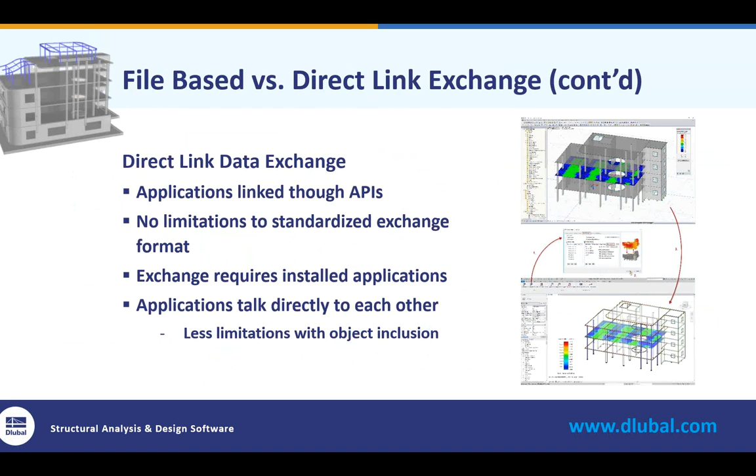With this option, the applications talk directly to each other. So with this, we're going to see a lot less limitations with object inclusion. So back to my previous example with nonlinear supports and load combinations, well, now we can just code in the option through the API interface to keep this information available. So whether we're round tripping between the programs, we'll never lose that information, even if it isn't necessarily included in the program that we're interfacing with.

So this leads us to the Dlubal Revit link and the import-export options available. So I want to first note that this does utilize direct integration with API. So again, we're going to see a lot less data loss than when we're creating a data file format. This option is included in RFEM.

So for those of you who are not familiar with our programs and how they work, we do operate with the add-on module system. So RFEM is our main program. This provides us with a full analysis. Our add-on modules are utilized for design, for example, or dynamics. Well, the import-export options with the Revit link are all included in the main program, and this is at no additional cost. The ability to integrate between the two programs is bidirectional. So we can update all or only partial of the structure and continue to cycle between both programs continuously.

You can transfer the structure objects. So we can see here from our dialog box to import export in Revit directly the ability to turn on or off these objects. We also have the ability for the transfer of loads and load combinations. So in our next tab, the structural settings, again, you see the ability to turn on and off those load cases, load combinations, result combination options.

And lastly, with regards to result sharing, we have the ability to export the RFEM results to Revit. This includes both members and surfaces. So we're going to see the information available for deformations, internal forces for those members and those surfaces, and reinforcement, for example. Now, we've had the ability to transfer reinforcement of surfaces, so whether that's walls, elevated slabs, slab-on grades for concrete design from RFEM to Revit for quite some time, but we also recently added reinforcement for members.

I want to turn it over to my colleague Lukas now, who will take us into an example between the two programs today. Okay, thank you very much, Amy, for the introduction and the overview. I think you should be able to see my screen. Hello also from my side.

In the next 45 minutes, I would like to show you the interface in action, and during that, I would like to highlight a few different scenarios Amy already mentioned. The first scenario will be one where we have a structure ready in Revit, and we want to export the data from Revit into an empty RFEM model. Therefore, I would like to show you now the Revit structure. Maybe as a side information, I'm using here Revit 2019. We do, however, support the interface down to Revit 2016.

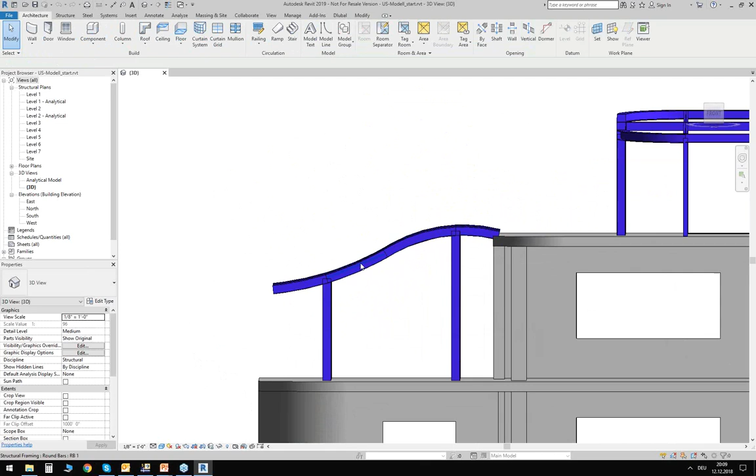Regarding the structure itself, I have here a mixed structure made of concrete and steel. I have a foundation slab. I have some walls with openings. I have curved walls, as you can see here in the corner. I have slabs with openings, concrete columns, and 2 steel constructions on top. The one on the left side has a curved roof shape, and the one on top has a sloped roof shape.

What you cannot see here right now in this Revit model, or what I did not include, is basically everything apart from the static relevant objects. So things for heating, cooling, ventilation, electrical systems, any kind of building services. You can have all those things inside the Revit model, of course. They're just not important when it's about to show the interface to RFEM. Important for the interface is the analytical model in Revit, and how you can get this analytical model I will show you now.

I think it's fair to say that what we have here is the physical model. It's the solid representation of the structural elements. So everything here is basically a solid. The foundation slab, the column is a solid, the slabs are solids.

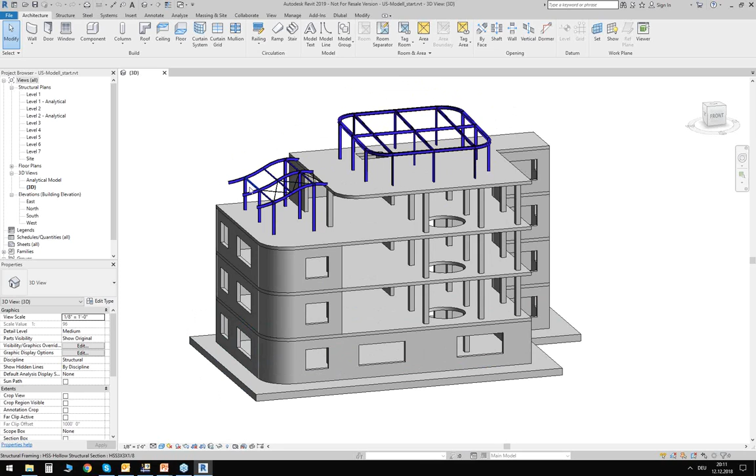But when it comes to the analytical model, we usually try to simplify things. So for example, the foundation slab we would usually simplify into a 2D surface, or the beams we usually consider as a 1D element. And this simplification can be done in Revit directly.

If you click on the structural element, you can access the properties here on the left side, and you can enable the analytical model. It has already been done here by me in advance. And if you do so, you will get an additional tab for the analytical foundation. Here you can now edit the properties of this analytical foundation.

So you can, for example, assign a surface support below, or you can deal with the analytical alignment of this 2D surface. Similar options you also have for walls and other structural elements, for example also for beams. Depending on the analytical object you select here, you may have different settings you have to deal with, or you can deal with.

So for example, we have here as well the analytical alignment of the member axis, but we also have an option to define member end releases in Revit. Additionally, and this is now a little bit Dlubal specific, there are Dlubal parameters that I activated in advance. I have here an option to define this analytical member as a member type truss. Or for my bracing, I can define it as a member type tension. This is information which we can exchange with RFEM or RSTAB, and I will explain it again afterwards.

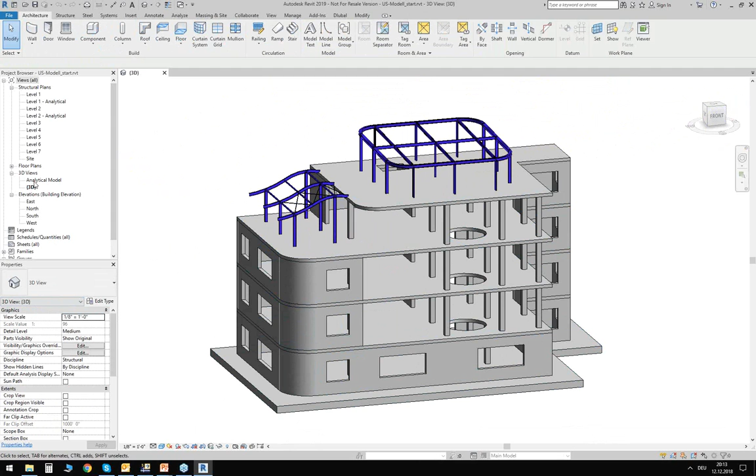Okay, so by activating the analytical model for each of those elements, you can create the global analytical model. And this you can of course also see in Revit. Revit has a predefined 3D view, which we can activate. So again, this is the analytical model. This is what we will export afterwards to RFEM. And you can see what I just mentioned. The foundation slab is now a 2D surface. Also, the members in general are now just 1D elements.

So in general, I think it's clear that when we export the analytical model, the geometry is quite clear. It's fixed, clearly defined by the length and the height of the elements. What's maybe not so clear is the exchange of information. And with information, I mean the exchange, for example, of the material names, of the cross-section names, and so on. I think in general, you can imagine that the material names in Revit may be different to the material names in RFEM. So how you write the name can be different.

Maybe I can show you one example here. I go to the Manage tab into my material library in Revit. And here you will find a material which is named Concrete Normal Weight 4 ksi. This is the material that I used for my concrete elements here in the background. If we exported that name to RFEM, RFEM probably couldn't handle it. It doesn't know what kind of material that is, because the name of the equivalent material in RFEM is different. So we somehow have to link this information between those two programs. We have to define something like a conversion table.

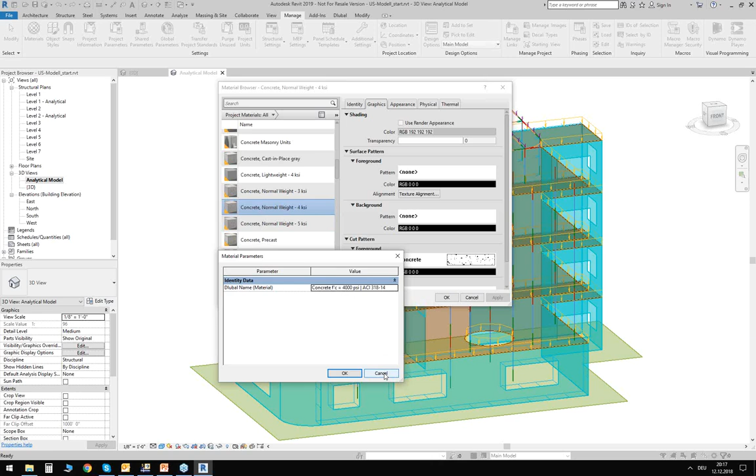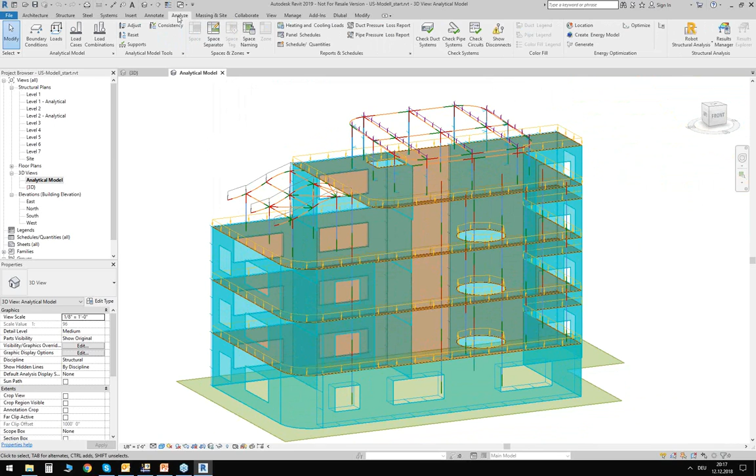Apart from that, we can also see some loads inside this analytical model. So we see here that there are some loads assigned to my members. Revit gives me the possibility to define load cases, load combinations, and even loads. You can access this information via the Analyze tab, and you can click here on the load cases, and you can see we have here 4 load cases for the dead loads, live loads, wind loads, and snow loads.

And all this information I can now export to RFEM. And I think this is something we could do right now. So how can I do it? First of all, I will show you my empty RFEM. There's nothing inside. And I can start the export from Revit. So I have here a Dlubal tab. And I have here options to export and import between RFEM, export and import to RSTAB.

And here I have some additional buttons. Here, for example, the one which we call Dlubal parameters. This is what I just explained. We have parameters for the materials, for the cross sections, for these special member types. Here you can activate these parameters in Revit, so you can access them here in these windows.

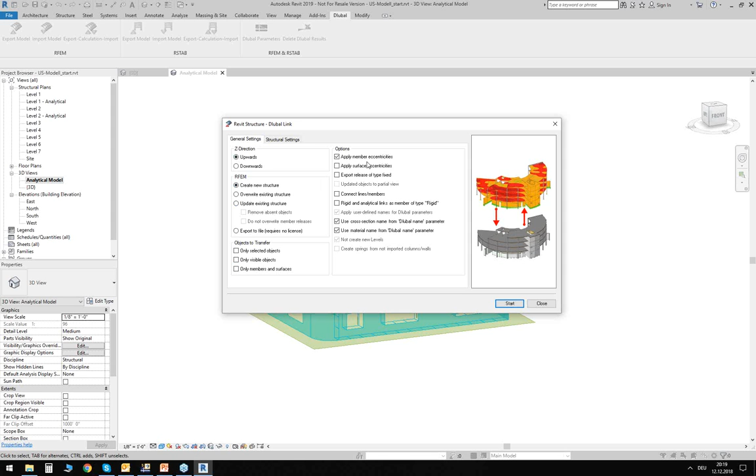So I want to export my model to RFEM. Therefore, I export this model. I can define some detailed settings for the export. I can define the Z direction of my RFEM model. It should go upwards. I want to create a new structure in RFEM. I want to apply some eccentricities that I have here inside my Revit model. And I also want to use these cross-section and material parameters that I just defined.

Additional to that, I can also export my loads. I can run the export. And you will see that it's quite quick. Yeah, the export is already done. So I can close this window. I can open RFEM again. And you can see directly that the structure we receive here on this end looks quite similar to the one in Revit.

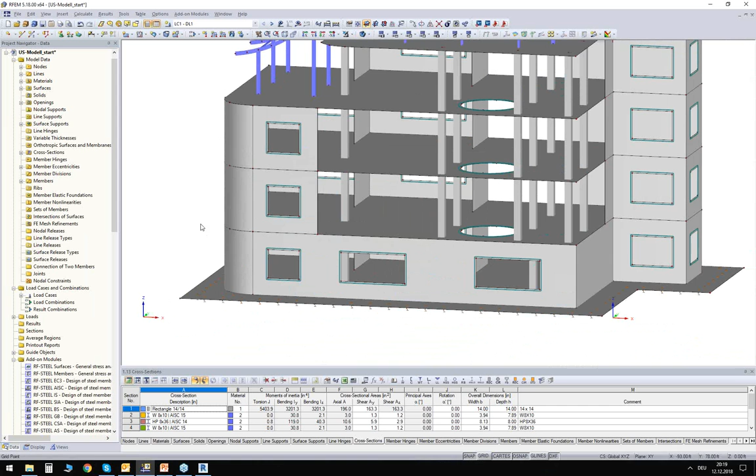We have the foundation slab as a 2D surface, of course, including some supports. We have our walls with the openings. We have this curved wall here in the corner. We have concrete columns. We have steel constructions here on top, the one on the left with the curved roof shape, the one on the top with the sloped roof shape. Yeah, looks quite good in general.

But if you exchange data, you always want to make sure that you exchanged the data correctly. So we should have a detailed look at this data. There are different ways to do it, and I would like to show you one way, by using the display navigator here on the left side. And here I have an option to render my objects according to different colors. So for example, I can render my structure according to my materials. We haven't seen any difference now because it's basically the default rendering option.

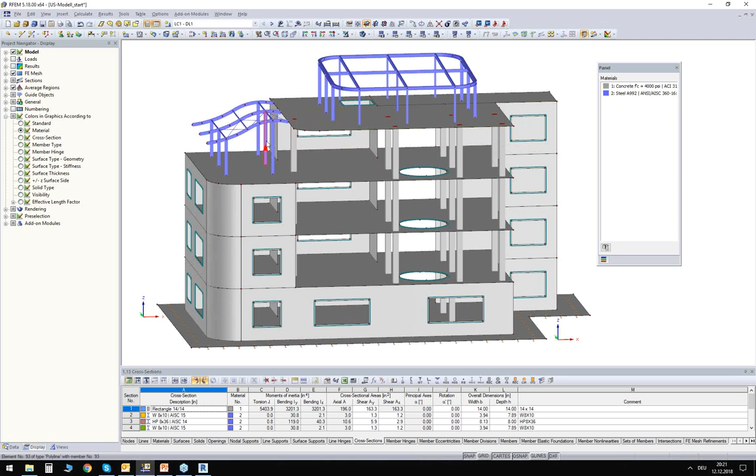What we can see here is that every gray element is made of concrete and every blue element is made of steel. We will see an effect if I change it to rendering according to cross sections. Yeah, thank you. We see here that the cross sections are now colored, and the color represents a specific cross section. So this allows us to get a nice overview of the structure and the exported sections from Revit.

We have further options here, for example, the member type. This is something I wanted to explain again. You can see here that we have different member types. We have member type beam, truss, and tension. And this is what I defined in Revit before. We said the coupling member should be a truss member. And we also said that this bracing should be a tension member.

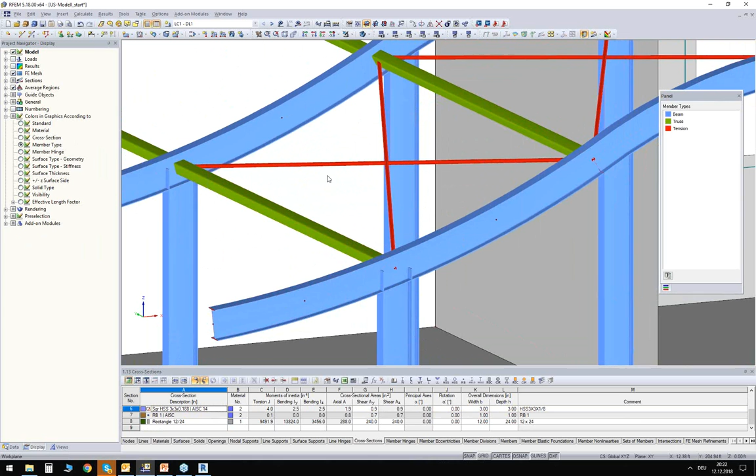And this is advanced information for RFEM. This basically means a truss member is a member with hinges at the beginning and the end, and a tension member is a truss member plus a nonlinearity assigned so that it fails under compression. So this is additional, advanced information that you can exchange between Revit and RFEM, or Dlubal in general.

Okay, there are further options, for example, the rendering according to surface thicknesses and so on. And there's one which I also want to show you. It's according to member hinges. What you can see here is that there's no color included in this graphic. That tells me that there is no hinge included. So I have no member hinges here in this structure.

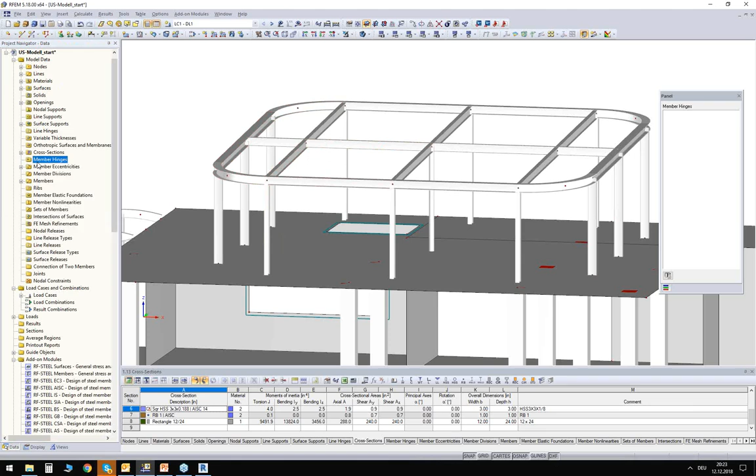What that means is that every connection here in the steel construction is a rigid connection. And as a structural engineer, this is something you want to avoid. And of course, we can add these member hinges here in RFEM as well. So what I'm going to do is the following. I will define one type of member hinge. In that type, I want to release the rotations around the Y and the Z axis.

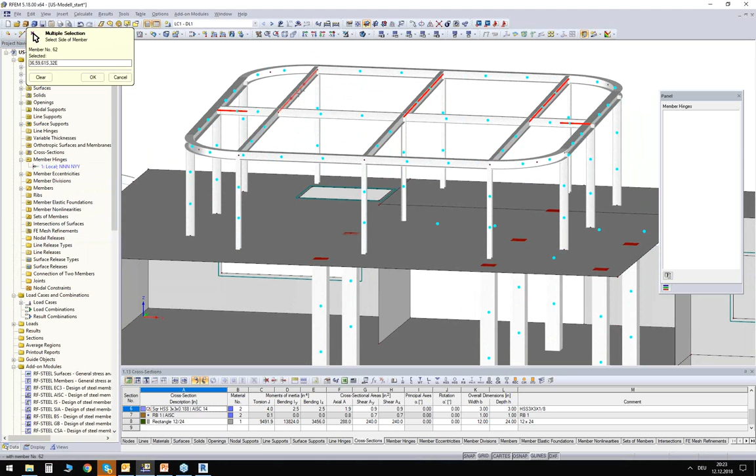And now I can assign this member hinge graphically to my RFEM model. Assign graphically to members. The only thing I have to do right now is select these members. Depending on whether I select the end, the start, or the center of the beam, I will apply this member hinge to the end, start, or on both sides. Okay, let me just double check if I did it correctly. Yeah.

I could even double check it by this graphic, which we still have activated. You can see now I have one member hinge here, and the blue color will show me on which side of the beam I defined it. Okay. So with the display navigator, we can double check, for example, the imported data. We assume the model data is now correct. So I want to continue with my loads.

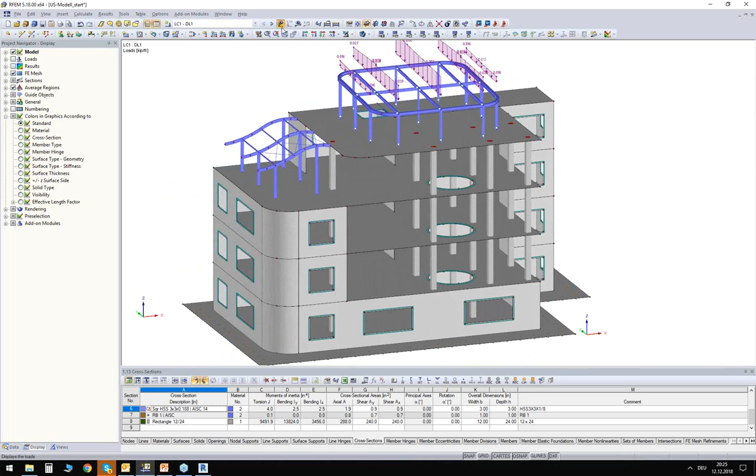I have here 4 load cases. These are the 4 load cases I expected to have because I exported them from Revit. And I can also take a detailed look. I have some dead loads, additional dead loads. In this load case, I have some live loads here on top of the slabs. I have some wind loads and also some snow loads.

I can see directly that the person who created the loads in Revit forgot the snow loads, for example, here on this steel construction. Again, this is something I can, of course, also add in RFEM. Therefore, I'm going to use a small generator. I will generate some loads from area loads on members via plane. So I'm defining the magnitude of these loads, 0.02 KSF. They should be related to the global projected area.

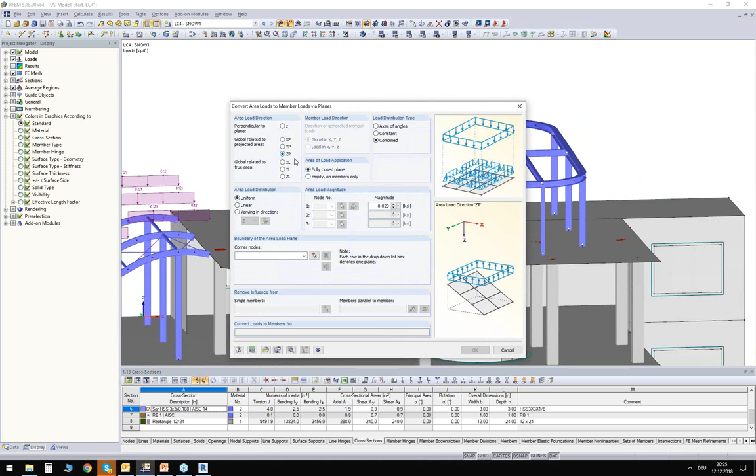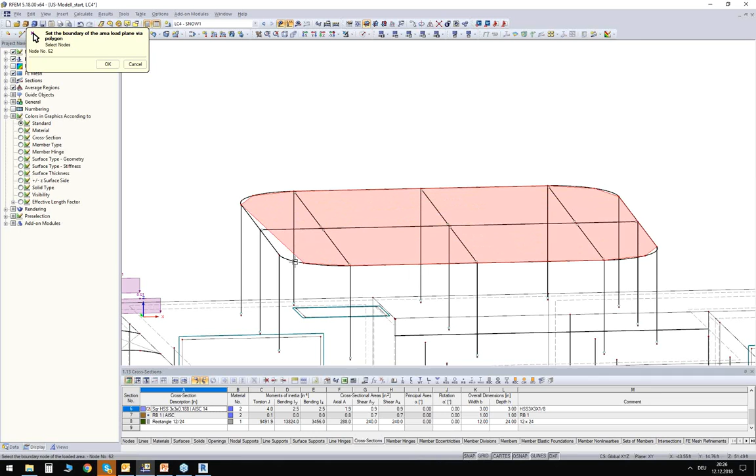And I can pick the corner nodes of my area where they should act. I will simplify it a little bit here for the presentation, just so that we save a little bit of time. So I'm picking these corner nodes and I'm cutting a few edges, I know, but it should be okay for now. I want to remove the influence from all horizontal members because I want the load to be applied only on the slope beams. Okay, so this is what I receive.

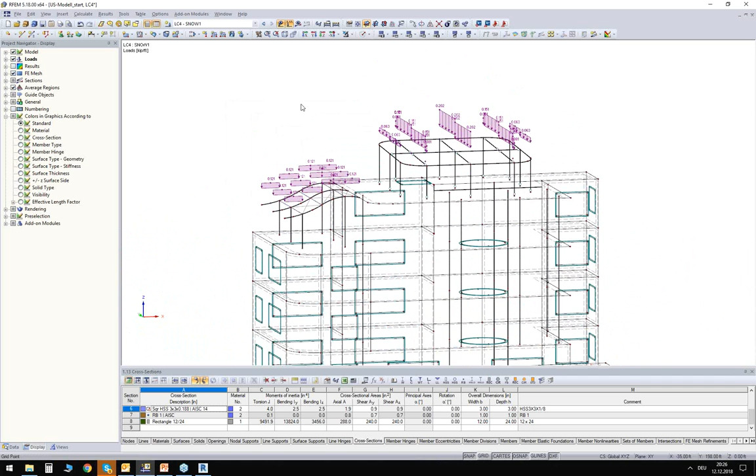After I did that, I can see my area load. I can also change the display and display it separately as member loads. The intelligence of that generated load is still active, as you can see. So it's still a generated load. And this is an advantage for something I will show you afterwards. Okay. I don't want to deal with the loads any longer. For now, it should be okay.

So the next step would be the combination of these load cases. This is something I can do in RFEM as well. I go to my general data. I will enable the automatic combination of load cases according to the ASCE code, and create load combinations automatically. I want to control this automatic load combination a little bit. Therefore, I'm checking the related tables.

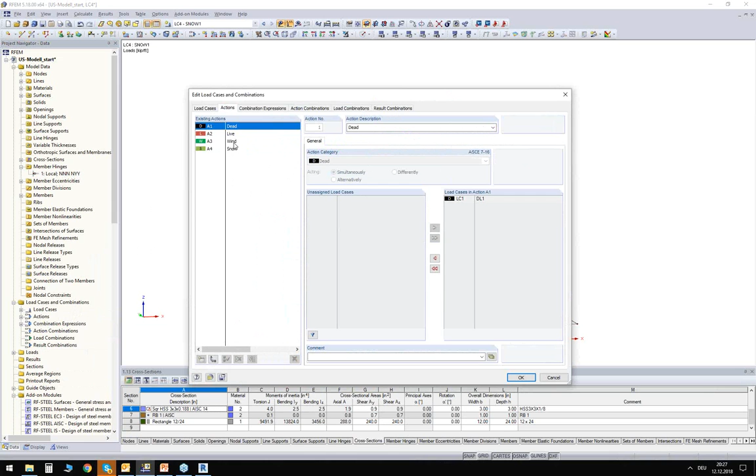First of all, I want to make sure that the correct action category is used for every load case, which is the case here. In case we had multiple load cases in the same action type, for example multiple wind load cases, I could control here in that area that they should act simultaneously or alternatively or in groups or whatever.

Another important piece of information which we have to give to this automatic combination is according to which design situation it should create these combinations. So there is the LRFD section, the ASD section, extraordinary, structural integrity, and so on. And every design situation has its own rules for how you have to combine load cases, which you can see here. These are the rules according to the LRFD. These are the rules according to the ASD. You have different factors here and a different setup in general.

And depending on which design situation you create here, you will have additional load combinations, of course. I want to save a little bit of time, so I'm deactivating the ASD combination. I only want to have combinations according to LRFD.

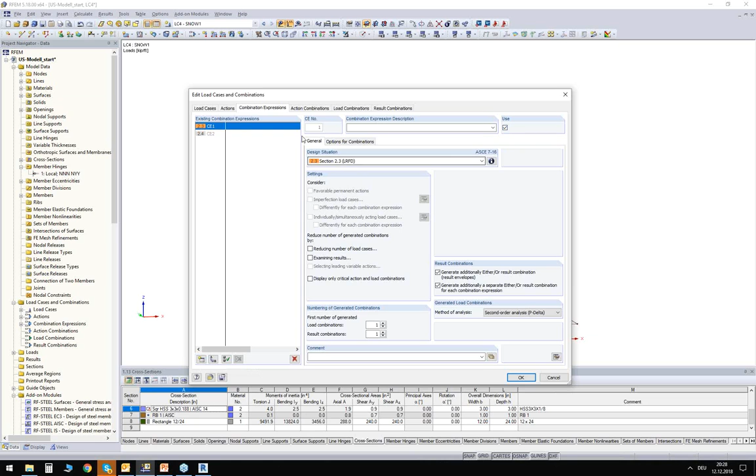I will create these combinations here. I can have a look at them again. I can see the factors, so I can control it or double check it. Additional to this, I get a result combination. A result combination is like an envelope for all load combinations. If you take a look at the results of a result combination, it will show you the maximum and the minimum and its related internal forces. Okay.

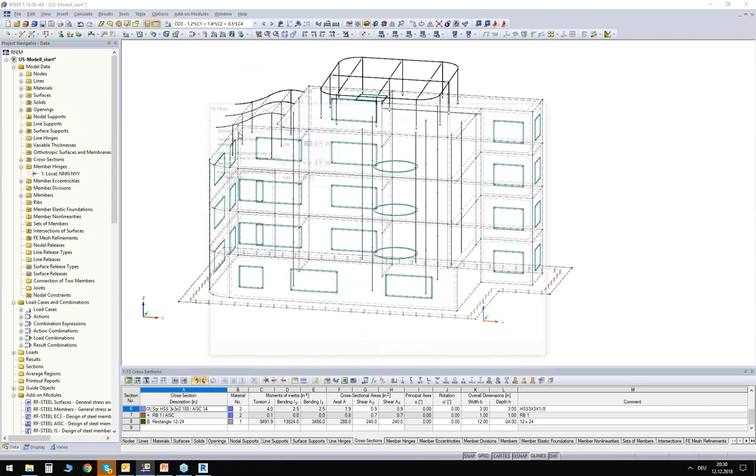You can access or you can switch between the load combinations via this drop-down menu. So before we run the calculation, we should have at least a rough look at the finite element mesh. It's a finite element analysis here, so the finite element mesh has a huge effect. So what I will do is I go to my FE mesh settings and I will only define the target length of my finite elements. This is the most important information for now.

I will regenerate the mesh and I can see the finite element mesh now. In general, you could say it looks quite good. It's decent. There are some areas where it's maybe not so optimal. For example, here on the right side, where I have these openings, the windows inside, I have just two elements between the edge and the opening. This is maybe not enough elements. So I want to optimize that area, let's say just this area here. How can I do this?

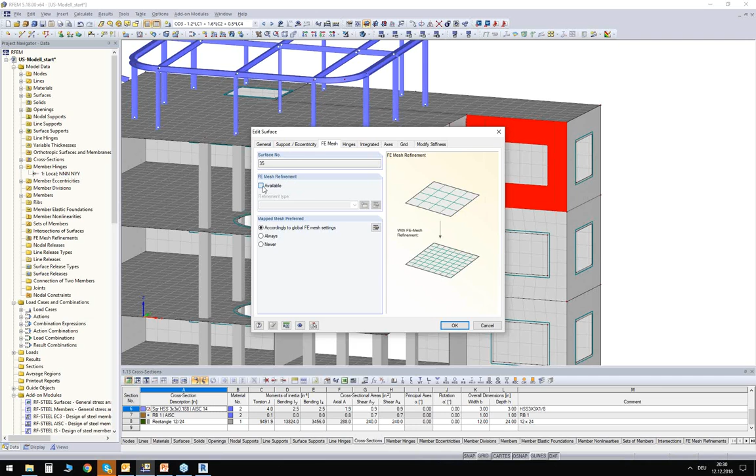I just double click on the surface. I can go to my FE mesh tab and activate a FE mesh refinement. The only info I have to give here is the target length of my finite elements in that area, maybe 0.5 foot. I accept and optimize that also on lines or on nodes. I will do it also for the node here. So around this node, I want to have an FE mesh refinement. I go to the tab, I activate the FE mesh refinement, and I can define additional information about the radius and the target length inside.

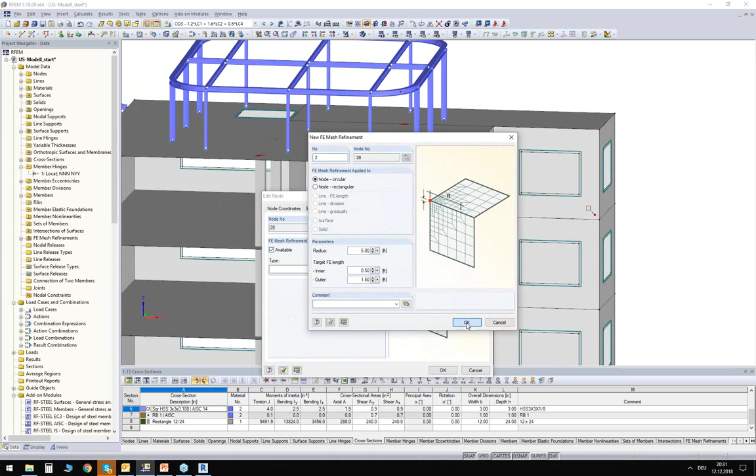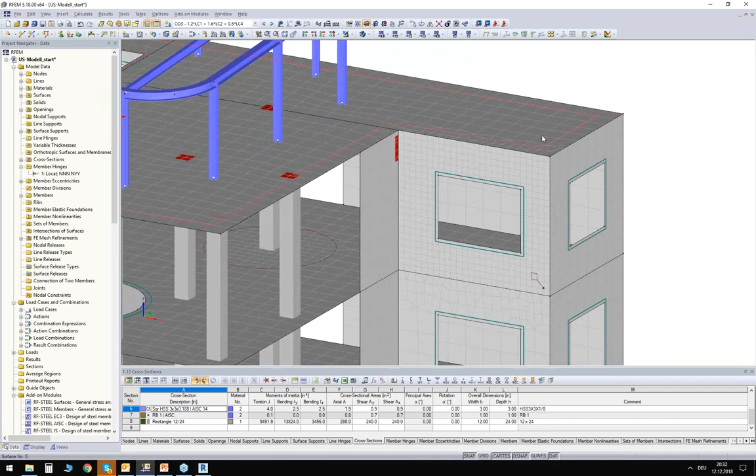Okay, we assume we optimized the FE mesh of the structure for every section. I will skip it here right now, and we regenerate the FE mesh. You can clearly see the effect now. So this is the global FE mesh. This is the refined FE mesh. You can see the effect as well here around the column. It was quite easy to change that.

Okay. So the next step is basically the calculation of the internal forces. I will do it by selecting my result combination here, and I will say, please show me the results of this result combination. I could have also done it in a different way. I could have clicked on the button calculate everything. But what does it mean? It will calculate also the results of my load cases. But I'm not really interested in the display of internal forces of my wind load case where there is no self-weight acting. So to save a little bit of time, I just clicked on the results of this result combination, and the program is intelligent enough to calculate only the required load combinations.

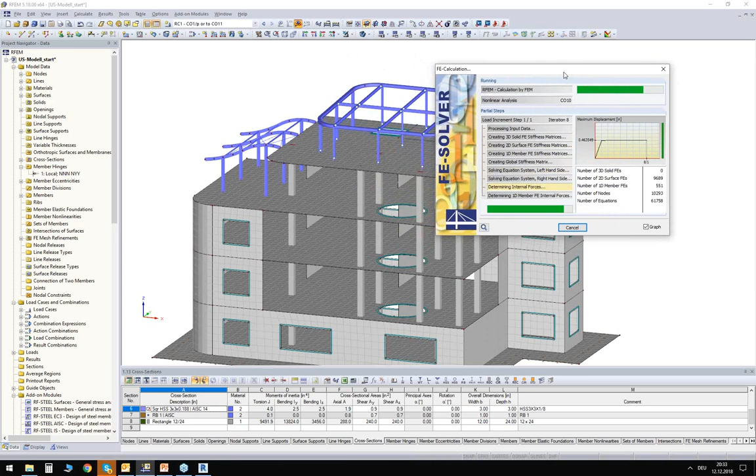Okay, we will see the results in a few seconds. And then we can continue with the design of the structure. For some reason, it takes a little bit longer than when I prepared it, but that's okay. Okay, the calculation finished, we will see the results in a second. And I can switch now again between my combinations and display for each combination my result. Let me decrease a little bit the display factor, otherwise it looks like the structure is failing.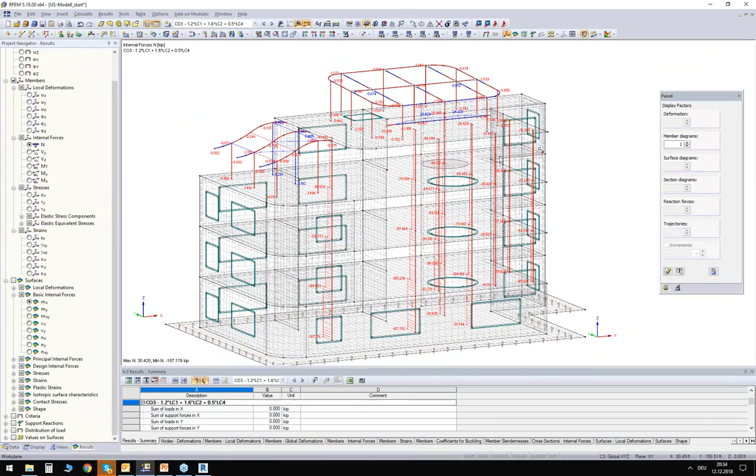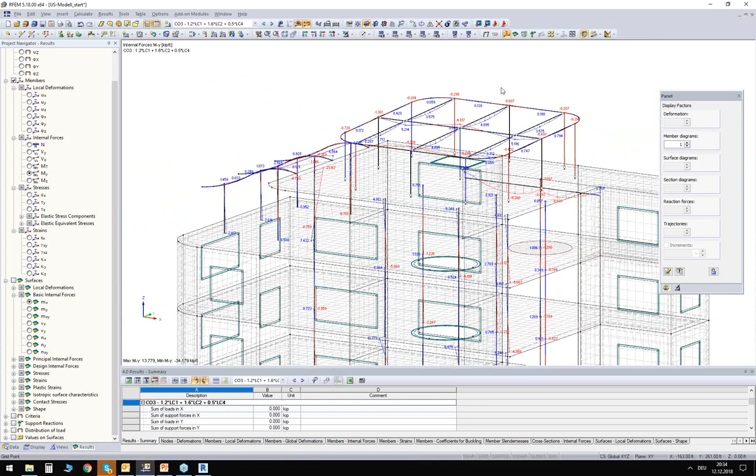On the left side, I have my result navigator now. I can switch between deformations or member internal forces. So for example, you can see really nicely that the axial force in the columns will be increased every time it intersects with a slab, of course. I can also display some bending moments, maybe to double check if the hinges I defined work correctly. I can, of course, also take a look at the results in my surfaces, maybe some bending moments in my surfaces, or even the contact stresses on the foundation plate on the bottom.

With the calculation of these internal forces, we are not done; we have to design the structure. That means we have to do additional checks, stability checks, stress checks, and so on. And these additional checks can be done in add-on modules or other modules.

And I want to go over this topic rather quickly because Amy has some really nice webinars where she explains every module in detail, or the most common modules in detail. So one module which I want to show is the module RF Steel AISC. It's for the design of steel members, and this is what I'm going to call up now.

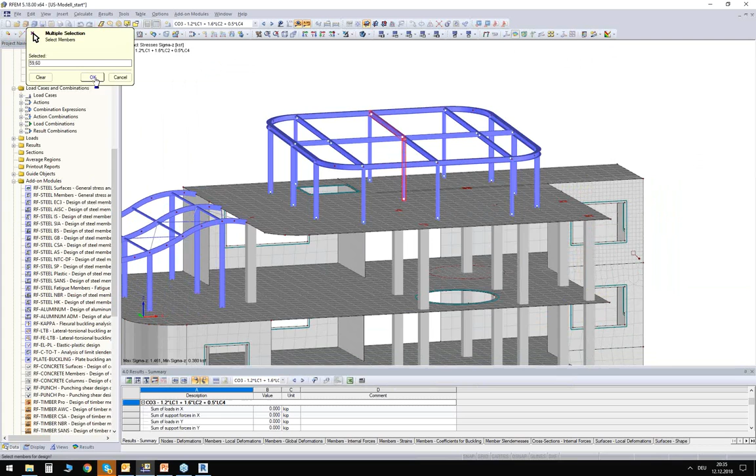You will notice that every module looks more or less familiar. So if you can handle one module, you most likely can also handle the other modules in general. So what I have to do is I have to select the members that I want to design. I only want to design here this beam and this column, for example. You can pick the code you want to design according to, and also the result combination.

You have now additional windows that you can go through. Some of them are just to give you an overview about certain properties for materials or cross sections. Other windows deal with the stability checks of the beams. So for example, you can define intermediate lateral restraints, you can define the buckling lengths, and so on, or the design parameters. I will leave those values on default.

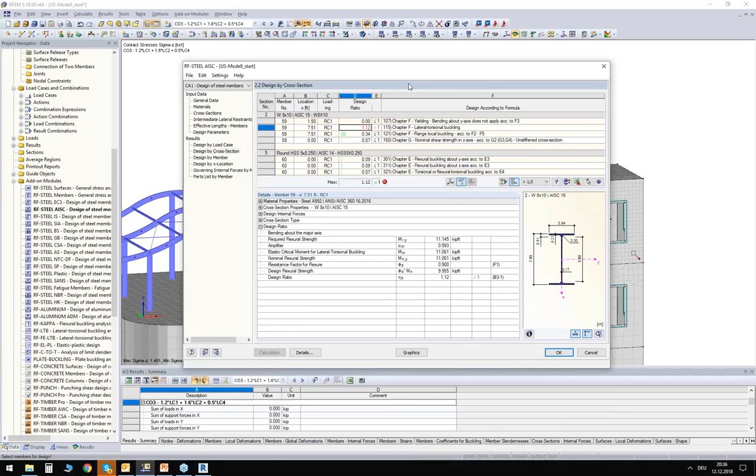So I will run the calculation and I switch into my result table design by cross section. So what I see here is for each cross section that I designed the maximum checks. And I notice directly that the W section for the beam has a design ratio about 1.12. So it's higher than 1, which is not good. On the other hand, the design ratio of my column is not even at 10%. So I have to optimize both cross sections somehow.

And I can do it the following way. I can go to my cross section window again, and I could, for example, let the module optimize the pipe section automatically from the current row. Current row basically means following: it will look for the best section in this list here. And with the best section, I mean the section where the design ratio is smaller than 1. And the criteria for this optimization is actually the self-weight of this section.

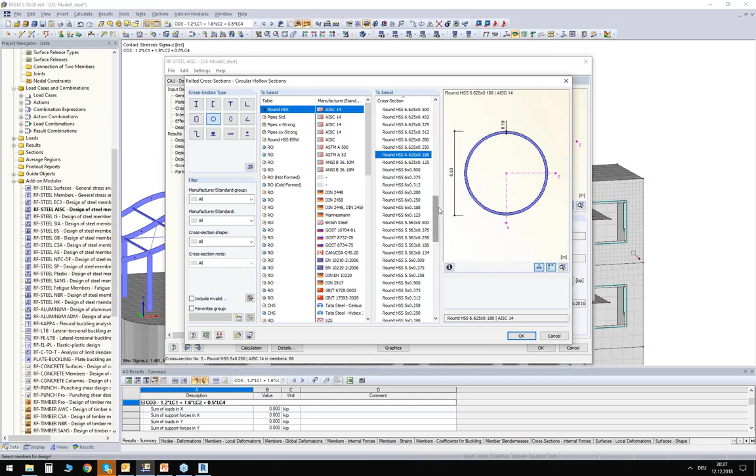Okay, wait, I did a small mistake, sorry. Import cross-section from RFEM, I changed it, which I didn't want to. I want to optimize the cross-section, and I could, in general, do the same for the W section, but due to constructive reasons, I'm not able to change the section.

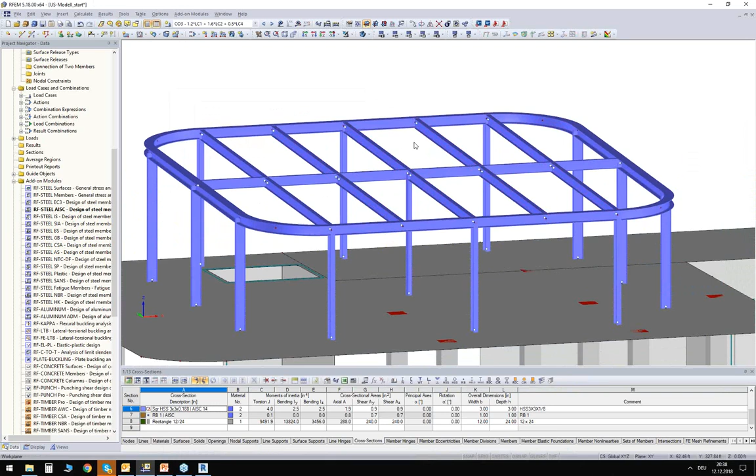So what I'm going to do here is I'm going to apply additional beams in my roof. So I just select the beams, and I use drag and drop to copy them. It's like a graphical tool to copy beams, and it's really quick and easy. And by defining additional beams, I will spread the load. And this is something what I want to show.

If you remember, we defined here this generated load where we defined the area where it should act on and so on. And this load is so intelligent that it recognizes these new members, and it will redistribute the area load to all beams now, to all slope beams. And this basically means that the load on the beam we design will be reduced.

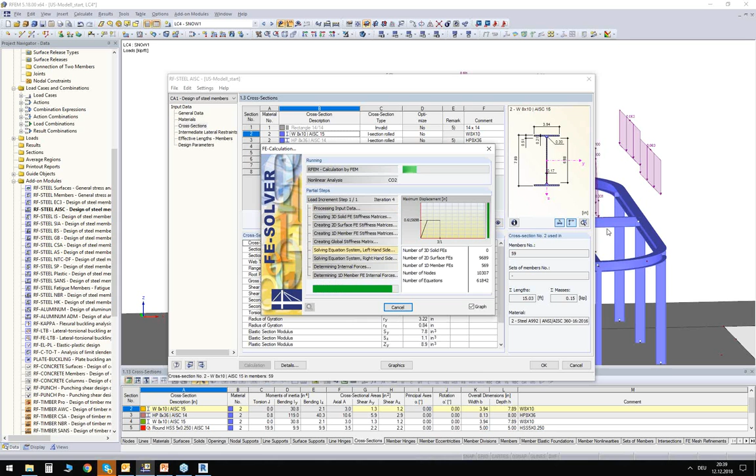So I go back to my module, and I rerun now the design. So for the pipe section, I'm using an automatic optimization, and for this section, I optimize the analytical structure in the background. I click on calculate again. And of course, I have to recalculate now the internal forces simply because I changed the analytical model in the background. I added additional beams, I redistributed my loads, so I have to rerun the analysis.

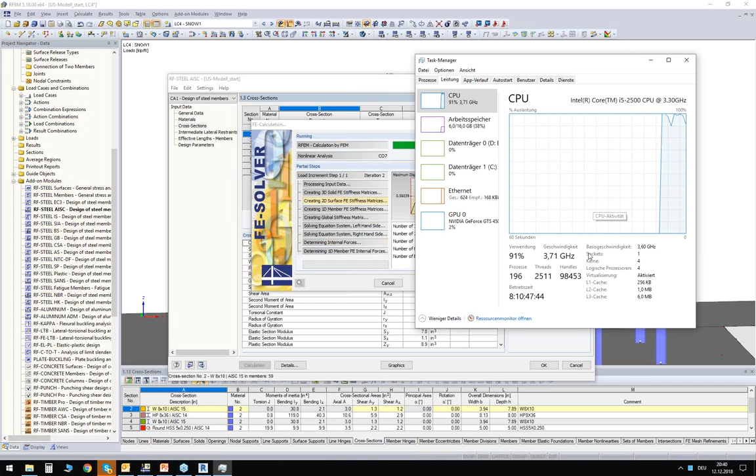Maybe one side information while we are recalculating this. Maybe something I can show you, the task manager. And in the task manager, you can see that I'm using more or less 100% of my CPU. That means we are able to use all the physical cores from the processor or from the CPU. So in case you have a good hardware, it will definitely benefit the performance during the design or during the calculation here. Okay, we have to wait a few seconds more and then I'm done with the design.

Okay, this should be the last one. We will see our result tables again. And in these result tables, we will see now that the design ratio of the W section is at 66%, which is fine. And the design ratio of my pipe section is at 94%, which is also fine.

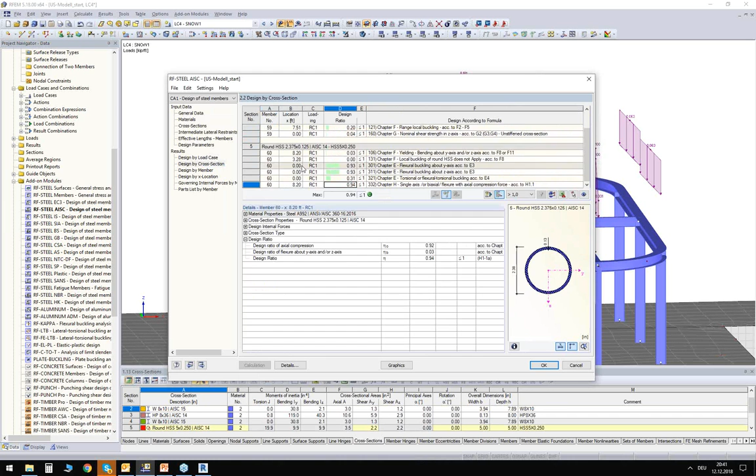So to make it 100% perfect, we would actually have to redesign everything, because the design of this optimized pipe section has been done with the internal forces of my original structure. So what I would have to do is export the optimized cross section back to RFEM, recalculate my internal forces, and with these probably slightly different internal forces, I can rerun the design. I will skip this check right now, or this loop.

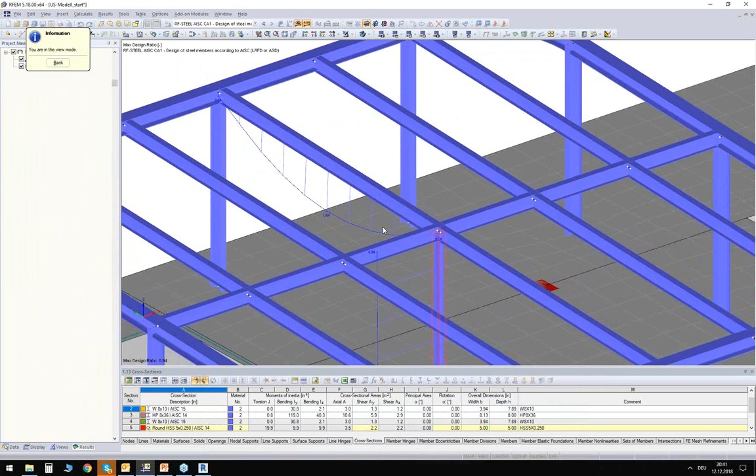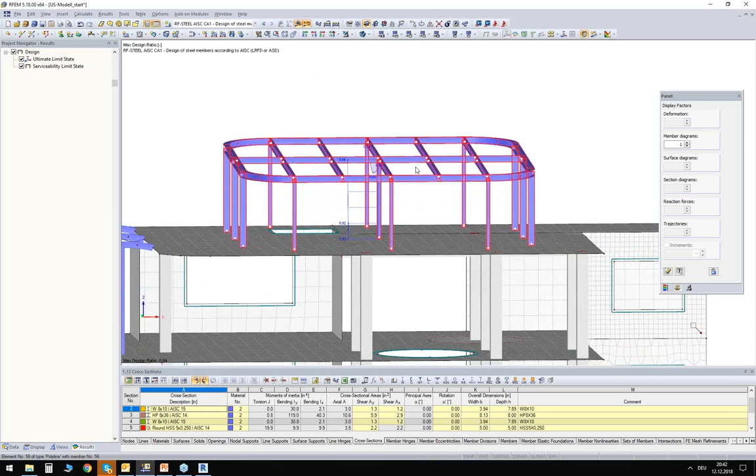Of course, we are able to display the design ratios also graphically. I think this is no big question. Okay, so we just changed a lot of stuff in that top steel construction here. We added hinges, we changed the amount of beams, and this is maybe something which you would like to give back to the Revit model. So you want to update the Revit model with this information. And the way you can do it is the following.

You go back to Revit and you run the import from RFEM. You update the existing structure. I don't want to consider any eccentricities right now. I want to apply loads, that is okay. And I don't want to import any results right now. Just update the physical model. So I can start the import, and you can have a look at this area here.

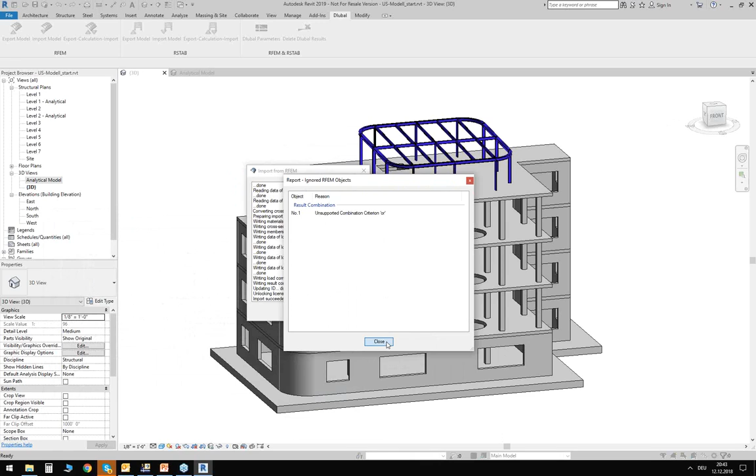Okay, so first of all, we get a message about an unsupported combination criterion. Basically, Revit tells me here that it cannot handle result combinations. It's not a big deal here. Important is that we have now these additional beams in the roof. And we also have updated information in the analytical model. So you can see here in the properties that we have now also information about the hinges on the bottom of this column and also in the beams and everything. So we were able to update the analytical model in Revit, and we were also able to update the physical model. We added new beams here.

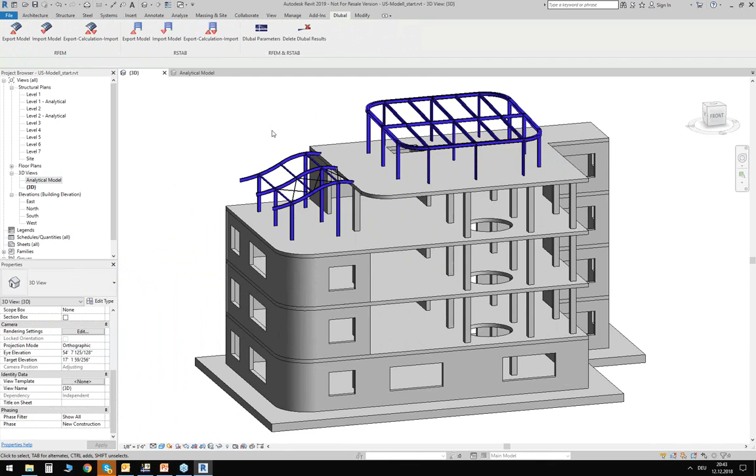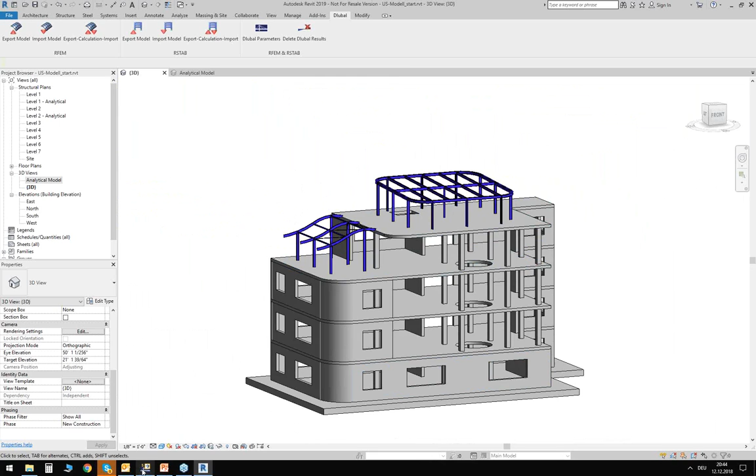Okay. The next thing that I want to show you is also the design of some concrete elements. I want to design the columns, and also there's a beam inside, which I didn't show you before. So there's also a beam, and I want to design these elements in RFEM and also export this result into Revit. So I go back to RFEM, and to design these concrete elements, I need a different module. This module is called RF-CONCRETE Members.

And it looks familiar, you can already see it. You simply have to choose the code you want to design the concrete members according to, and the load combination again, or the result combination in this case. And then you have again additional windows for the material, for the cross section, reinforcement layout windows, so which possible rebar you want to use, stirrups, the concrete cover, and so on. Again, Amy has some nice webinars about this module, which you can take a look at.

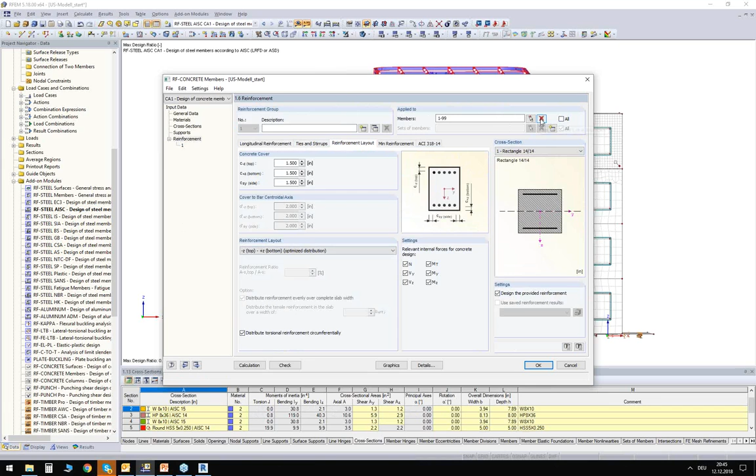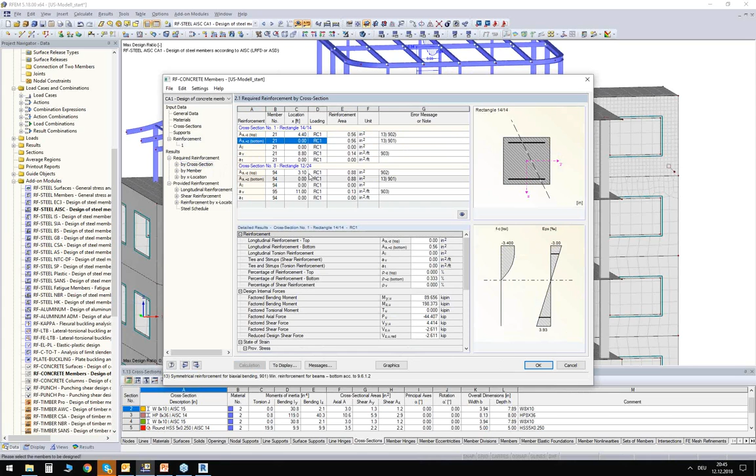The only thing which I want to change here is the members I want to design. So I'm selecting here all the columns from the highest concrete level and also the beams here in the background. Okay, I will run the calculation. Since I already have the results from my result combination, I only have to do the design of the beams, and it's quite quick. So I get now additional tables for my results. I have here information about the required reinforcements on the top and bottom layer of the section, for the shear, and so on.

And this module also gives me a provided reinforcement. So here I have some nice drawings, and I can also display this provided reinforcement in my RFEM structure. So I can choose here the concrete case, display the results, and enable the reinforcement rendering. So I will zoom a little bit in, and you can see directly I display here now the rebars inside my concrete column. And this is also working for beams, of course. Here you can see the stirrups and the longitudinal rebars in the beam, including the hooks.

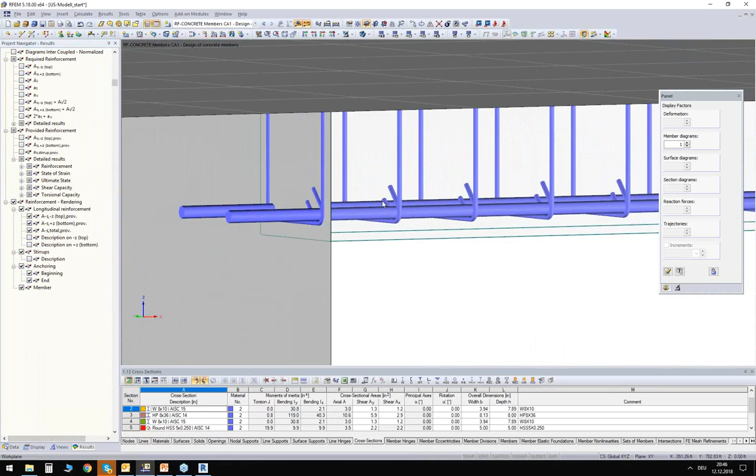And this is also information you can export. This is quite a new feature. So I can go back to Revit.

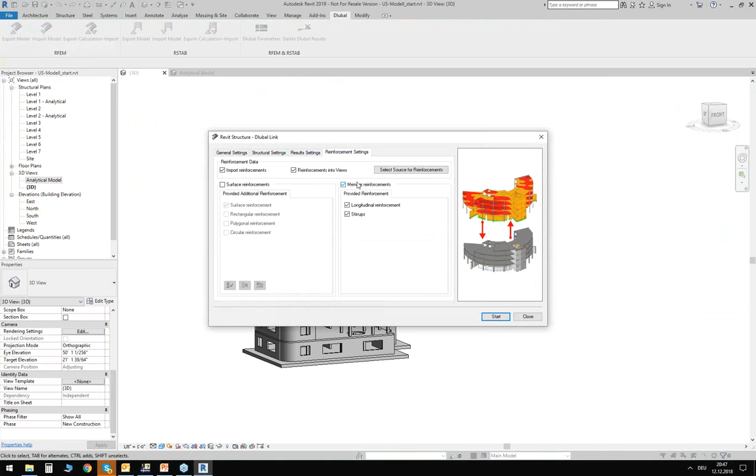I can import the model or import the results from RFEM. I will take a look at the settings here right now. So I'm not interested in results, I'm interested in reinforcement settings. I want to import the reinforcement, not from surfaces, but from members, because I designed members here, and I can run the import.

So this is again the log basically, which it will show us. And after the import, we get the same message again. I don't care here in that moment. But we also get a new 3D view, and this is called 3D reinforcements. And by default, the reinforcements will be displayed as a wireframe model.

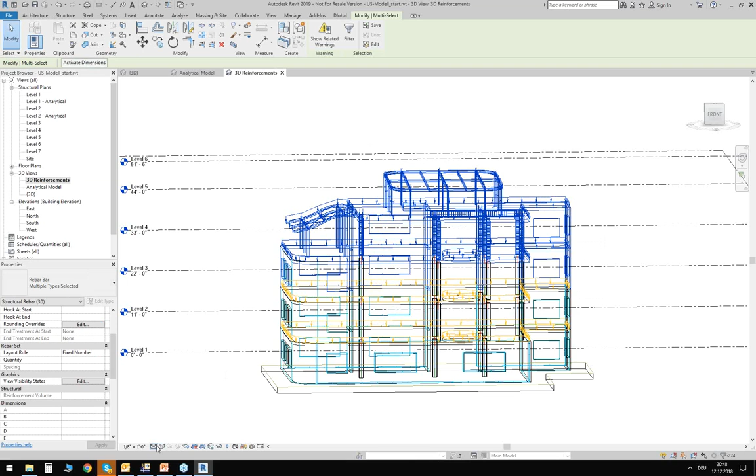If you switch a few visibility settings in Revit, for example, you have to change the visibility for the rebars in that specific view as unobscured object and view as solid. And then you can also change the display of the structure. You will see the rebars in a nice solid model here in Revit. So you can see the stirrups, the longitudinal rebars in the columns, and also in your beam.

And these are not simply graphical objects. This is actually a rebar. So if you click on this object, on the stirrups for the column, for example, you could change the shape of the stirrup. You can change the hooks. You can change the quantity of stirrups in that column, and so on. So it's an actual object you can work with.

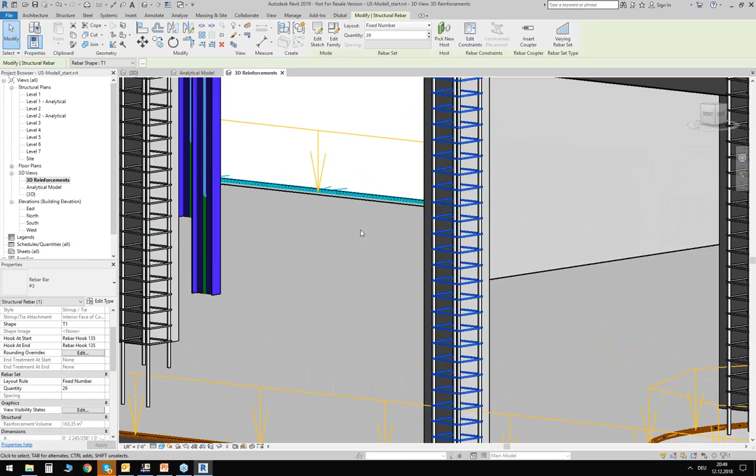Okay. This would be the first scenario that I wanted to show you. So the exchange between RFEM and Revit using the global model, the complete analytical model. And you could theoretically continue here. You could change, update, or add additional things in Revit. You can update the RFEM model. You can design the RFEM model again and export these newly found results or anything else back to Revit. So back and forth, and this is what Amy said, it's a bidirectional interface.

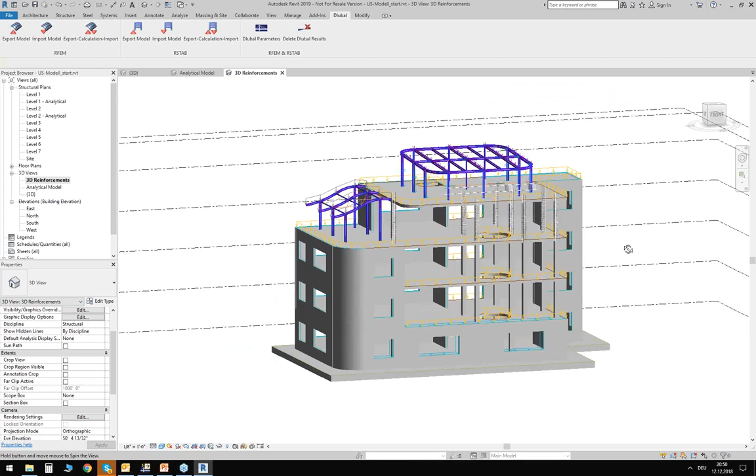But not in every situation do you want to export the complete analytical model. It's not always required, and not every engineer actually wants to work with big 3D models. Some prefer to work with smaller models, or they want to design it level by level, for example. And this is something I would also like to show you. You can export partial models from Revit to RFEM. And I did it in advance for this small steel structure here on top. I can show you.

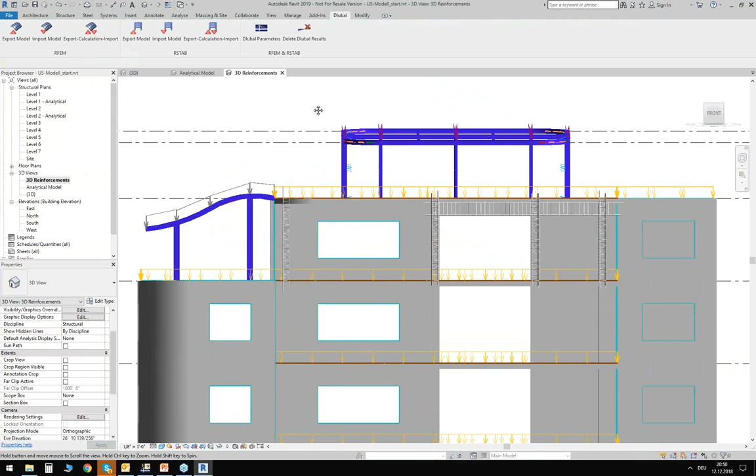So I have here this pavilion. It came from Revit, I calculated and designed it, and I have some support forces down here. And now I want to do it for the concrete structure below, basically for the following elements: the concrete walls, the concrete slab, and the concrete columns in that level. So I select those objects here in Revit, go back to my Dlubal tab, and say export model.

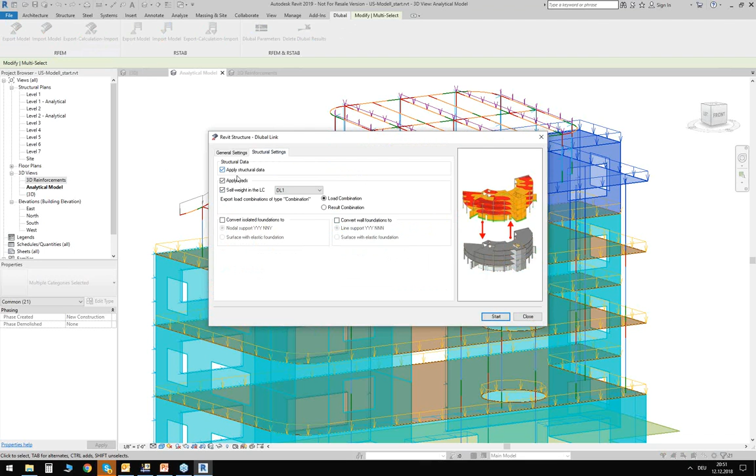I can create a new structure in RFEM, and I export only the selected objects. You can also do it via visibilities. I prefer selected objects here. I want to apply my member eccentricities, use my Dlubal parameters again, and also apply the loads. So I run the export. It's done. I can go back to RFEM. You can see here this partial model from Revit, just the concrete elements from the top floor.

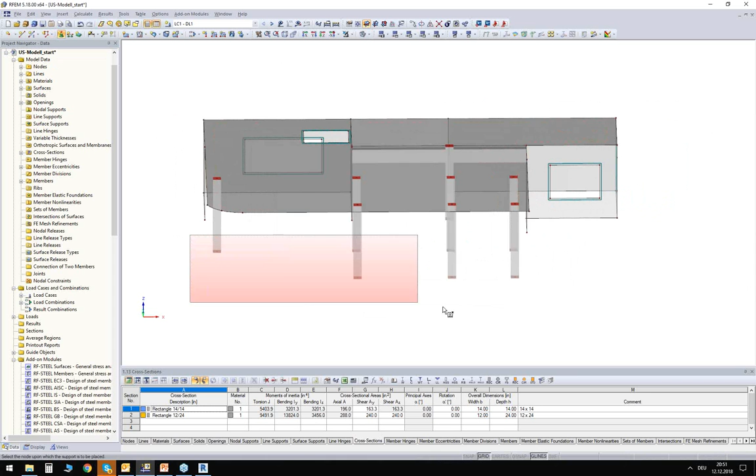And you can work with this, of course. You can support the columns with nodal supports. You can assign line supports onto the walls. And we also imported the load cases from Revit. So we have here the live loads on top of the slab, some wind loads, and so on.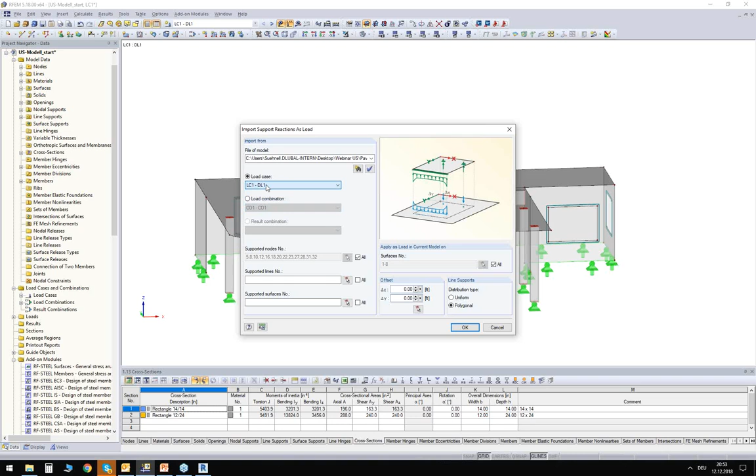But we now miss the loads from the structure on top, the pavilion, the support forces. But there is a nice tool in RFEM, which you can call up via the Tools menu: you can import support reactions as loads. So I will click on this option. I can choose the file, the pavilion that I designed before. I can say, please import the support reactions from all supported nodes from any load case that I calculated in there, for example, load case 1, and please place these loads on top of my slab.

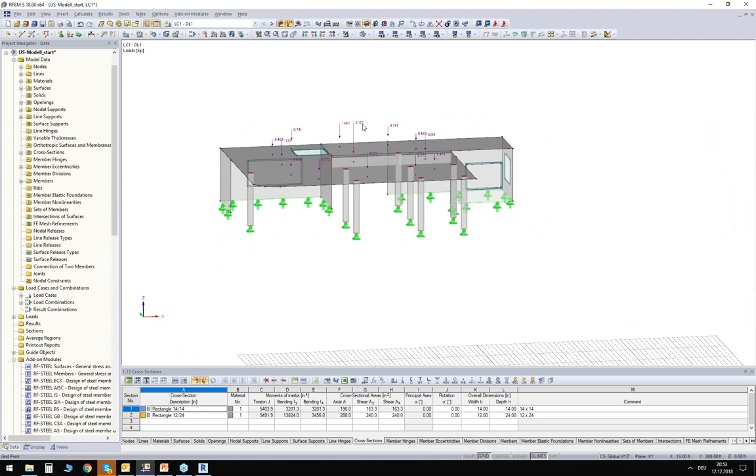Okay. You can see here now that we imported the support reactions from every column from the structure on top. And maybe you want to double check the values. We have here 2.1 kip. And if I go back to my pavilion, I can see here, this is the support reaction from my dead load case. And with this workflow, you can actually import the support reactions from every load case from the structure on top.

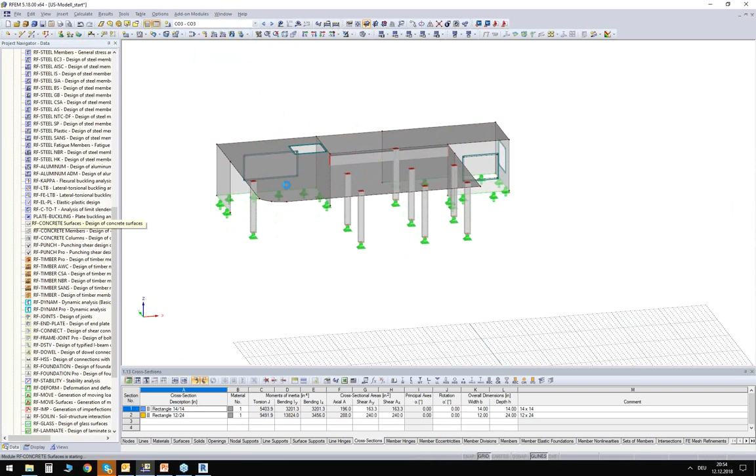And since we imported also the load combinations already, we can use it and redesign the structure. Maybe I can show that quickly. For the slab here, I can call up the module which is called RF-CONCRETE Surfaces, so to design concrete surfaces such as the slab or the wall. Again, it looks familiar more or less.

I will use here just the combination 3 now, according to the ACI standard. I will tell this module, please design me now only this concrete surface here, the concrete slab, and calculate the required reinforcements for this. This is what it will do now. I get now result tables with required reinforcements information, and I can display this also graphically, of course.

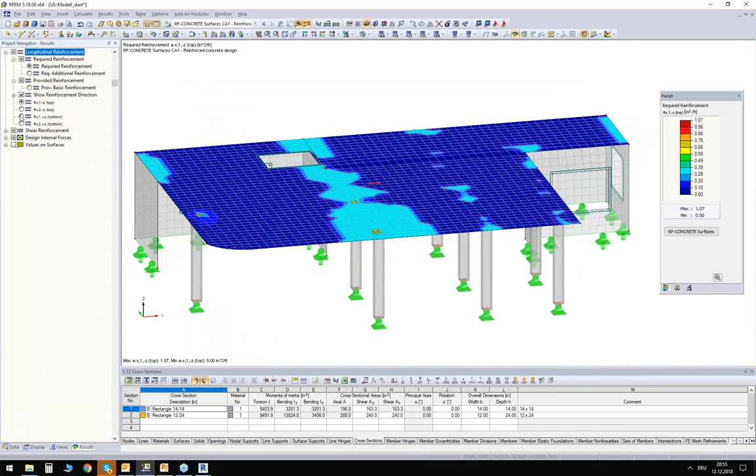So in my result navigator, I can display now the reinforcements on top, which is now higher in the area of my columns, or the reinforcements on the bottom, which is of course higher between my supported nodes. And these results I can also export back into my Revit model. So what I can do now is I can go back to Revit.

I can import results. Let me just check a few settings here. So I want to import now result values from my concrete case. No reinforcements, because we didn't calculate any reinforcements there. We calculated required reinforcement values. So I import these values.

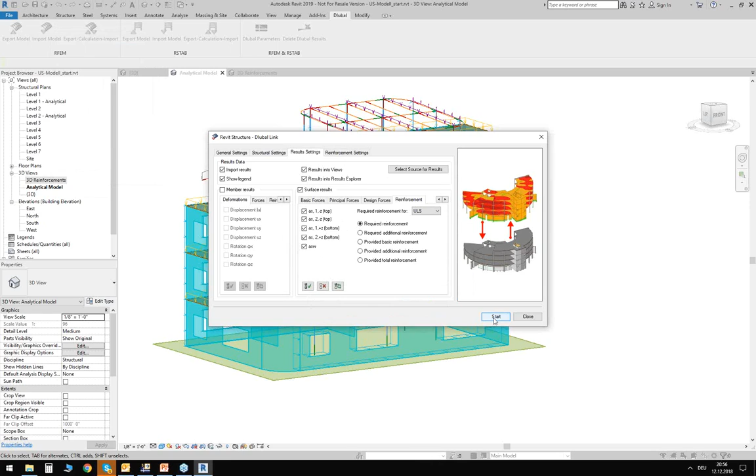I can click here on results from surfaces. Maybe all these results I want to import from the required reinforcement, and I can choose the source I want to import it from, which is this concrete case I just defined. Okay. I run the import. And what I will get afterwards is I will get a new 3D view here on the left-hand side.

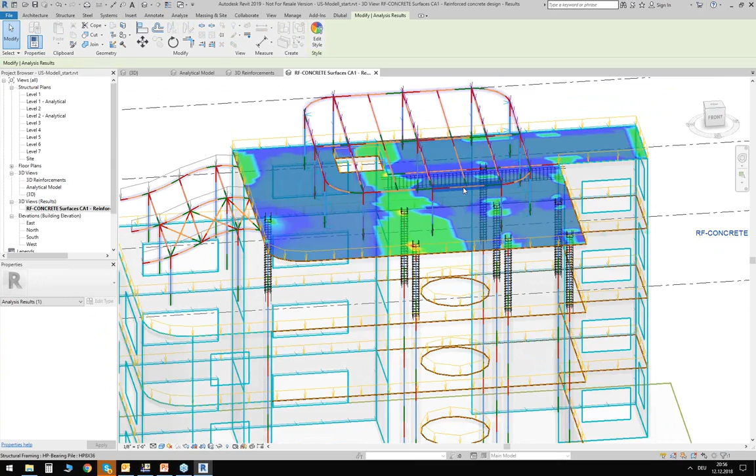And as you can see, I imported now the values from my RFEM model, including this navigator here on the right, this color scheme on the right. I can even switch between my results, because this is now just the reinforcements on top in the slab. But via a result explorer, I can even switch between my results in that view. So I can say, please display me also the reinforcement in the bottom of my surface. If I click on apply, this view will update, and I can see the bottom reinforcements in my slab.

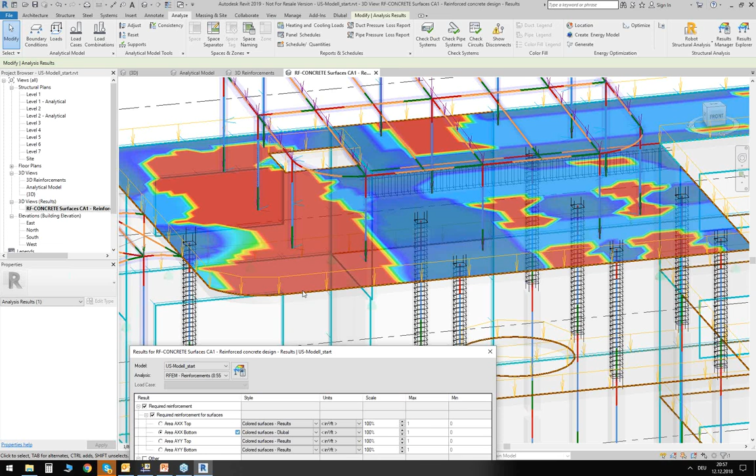So this is something that we just saw in RFEM before, right? So we can not only import here the rebars, we can also import result values from concrete modules, from internal forces, and so on. Okay, so this was the second scenario that I wanted to show you, that you can work with partial models. You can extract partial models and also update again the global model in Revit.

And the last scenario, which is even shorter to explain, is following. I will close every model that I have here in Revit. So there's no model open. I will also close a few models which I have here. So this one and the pavilion as well. So it should only remain this global model that I imported before. And I can do also following.

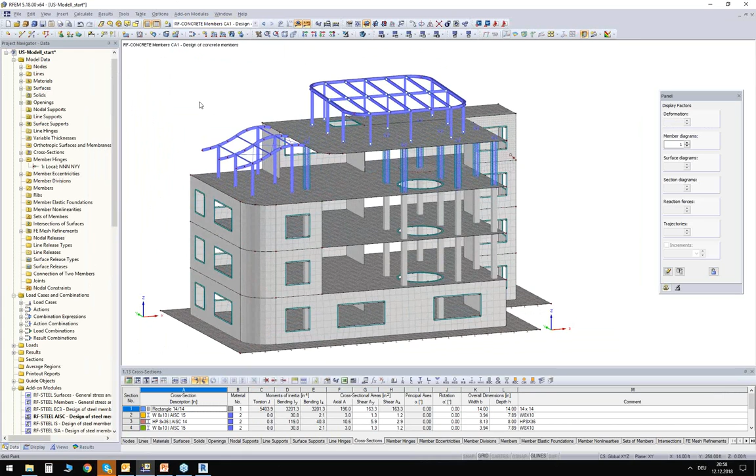Imagine there's a structural engineer who designed this mixed structure here, and there's an architect who has to create some drawings and whatever in Revit, and he's now asking for any information the structural engineer can give him about the structure. And the big benefit of this interface is that you can also export the analytical model in RFEM to Revit. So you can do it the following way.

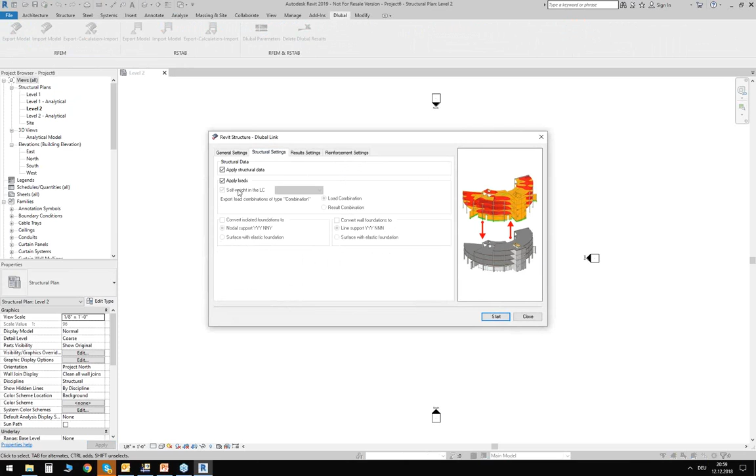You create a new model in Revit. You pick any template you have here, and you can go to the Dlubal tab, and you do more or less what we just did before. We import the model from RFEM, and we apply member eccentricities. I skipped the loads. We could also import the loads, but I'm not doing it right now here. Try to keep it simple, and I can run the import.

And then the following could happen. It could be that Revit is asking you if you could assign a Revit type for this type of section here. So there's a column in RFEM, a round hollow core column, a pipe section, where Revit doesn't know how to deal with it. Now you could think we defined these conversion tables, and the information is actually inside: the Dlubal cross-section round HSS, and so on, should be the following section in Revit.

But this message here is actually a completely different issue. The issue we have here is that the template that I used has no information about the family for this section. Revit is a family-based software. You have to create families for sections and for any element that you want to model. And if this family is not loaded in this project, then we cannot link between these two elements, between RFEM and Revit. So in this case you would have to load this cross-section from the Revit library, and you can do this the following way.

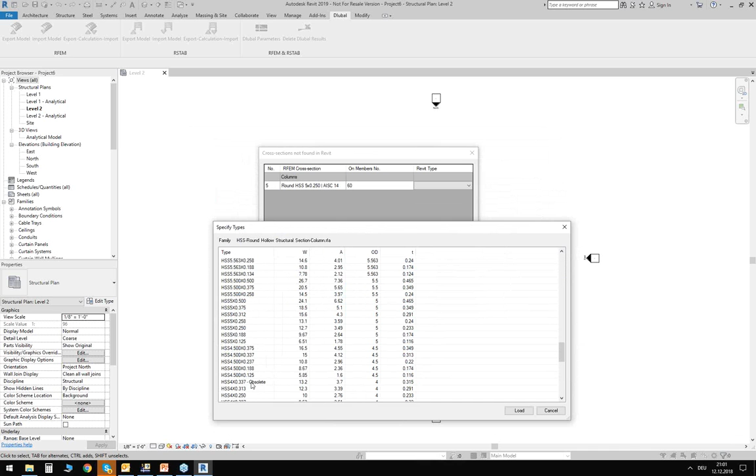You click here on that arrow, you go to load family types. Then you can download some libraries from Revit, from Autodesk directly. For example, the US Imperial libraries for structural columns made of steel. And here you will find this pipe section that we are looking for, 5 times 0.250. Wait, I'm too high. This section here, I can load it, and then I can apply this section. The import is running now.

Okay, import succeeded. I can close this window, and I can take a look at my 3D view in Revit. Maybe change the visibility mode here into the shaded mode. And you can see we were able to import a structure which looks quite good. We have here the sloped roof, we have the openings here everywhere, and so on. So we were able to import a physical model from the analytical model in RFEM. Of course, we were also able to import the analytical model as well.

But the big benefit here is that we get the physical model in Revit. And this is now something the architect can work on. He can adapt it. He can maybe even export it into different formats to exchange it again via IFC, via STEP, whatsoever. So it's really a big benefit, this third scenario, that you can create models in Revit from the data in RFEM. So this was most likely the content that I wanted to show you. I hope I was able to show you some new features or some interesting features.